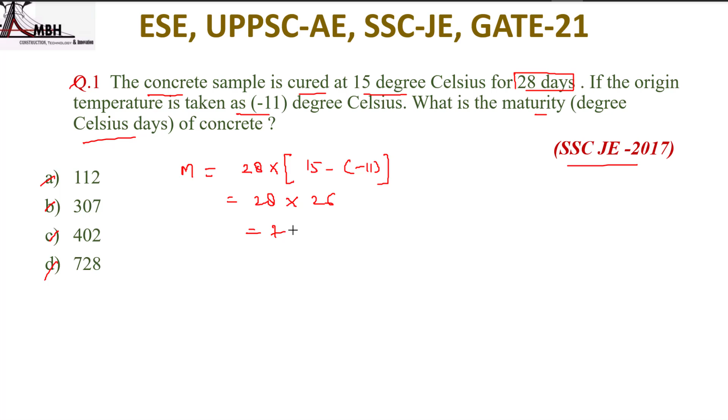Next question है, which of the following represent the correct expression for maturity M of the concrete samples? So options given है, क्वेश्चन पूछा गया है 2017 में. So basically जो maturity होता है, that is product of time and temperature, that is summation of time into temperature. So the correct option is option A.

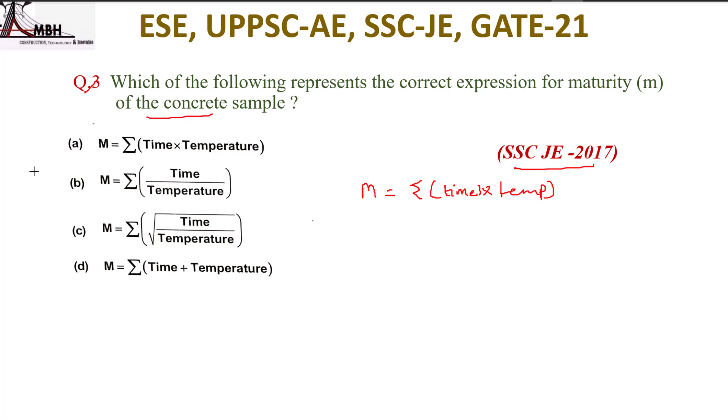Next question है, the dynamic modulus of elasticity of the sample of the concrete is computed in, options क्या है, compression test, split test, tension test, ultrasonic pulse velocity test. 2017 SSC JE में क्वेश्चन पूछा गया है. So the dynamic modulus of elasticity of the concrete हम लोग find कर सकते हैं by ultrasonic pulse velocity test के द्वारा. That means option D is correct.

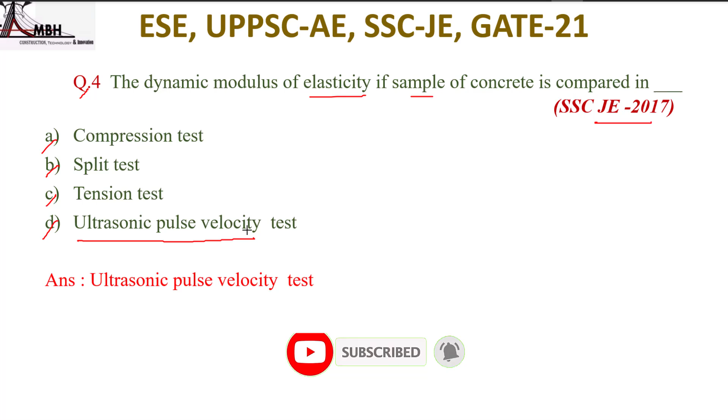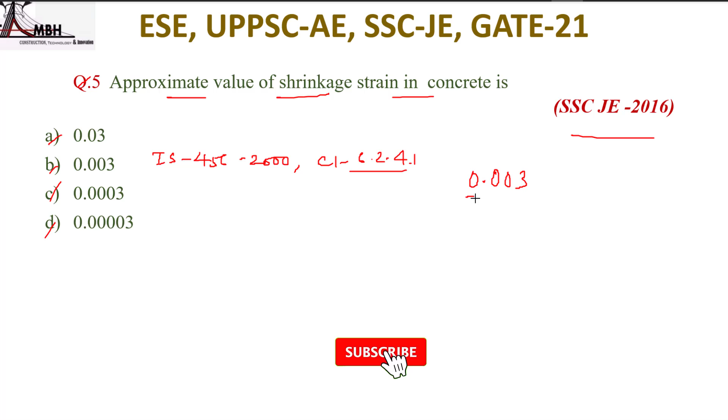Next question है, the approximate value of shrinkage strain in concrete is, option क्या है, 0.03, 0.003, 0.0003, 0.00003. क्वेश्चन पूछा गया SSC JE 2016 में. So as per IS 456:2000, clause number 6.2.4.1, in absence of test data, the approximate value of total shrinkage strain for design may be taken as 0.003. So option B is correct.

Next question है, the shrinkage of concrete can be reduced by using, options क्या है, low water cement ratio, less cement in the concrete, proper concrete mix, all the above. क्वेश्चन पूछा गया SSC JE 2009 में. So low water cement ratio से भी shrinkage reduce होती है, less cement content से भी reduce होती है, and proper mix concrete से भी reduce होती है. तो option D is correct.

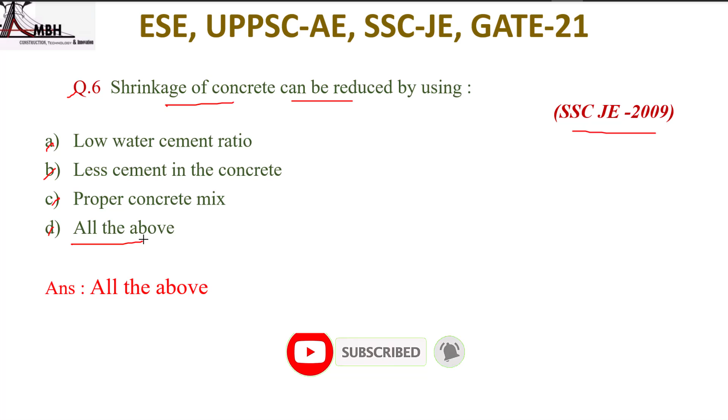Next question है, shrinkage in concrete increases its, options क्या है, bond strength, compressive strength, flexural strength, tensile strength. क्वेश्चन पूछा गया SSC JE 2015 में.

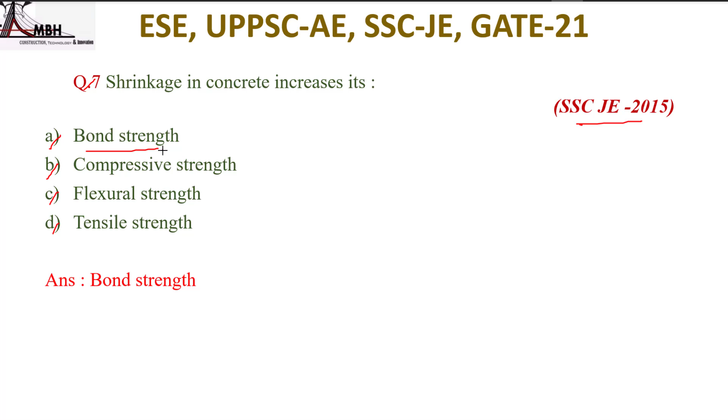So as per IS code, 90% strength is gained by the concrete in 28 days. So maximum hydration 28 days के पीरियड में होता है. तो maximum shrinkage takes place in concrete after drying for 28 days. That means option A is correct.

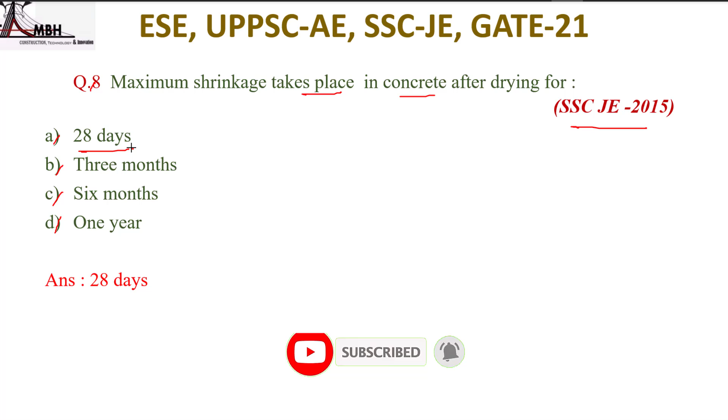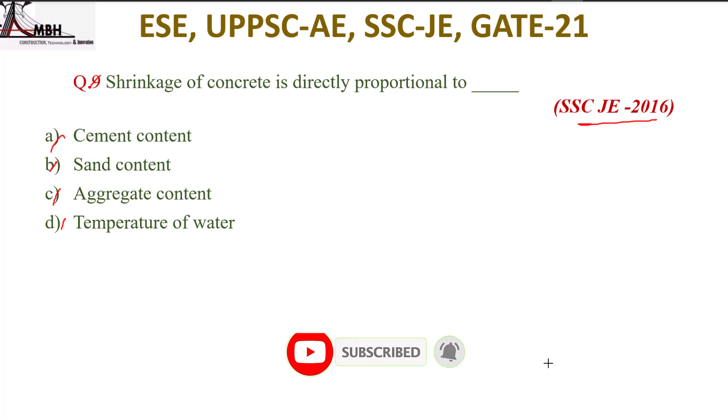Next question है, shrinkage of concrete is directly proportional to, cement content, sand content, aggregate content, temperature of water. क्वेश्चन पूछा गया SSC JE 2016 में. So shrinkage of concrete is directly proportional to cement content. That is option A is correct.